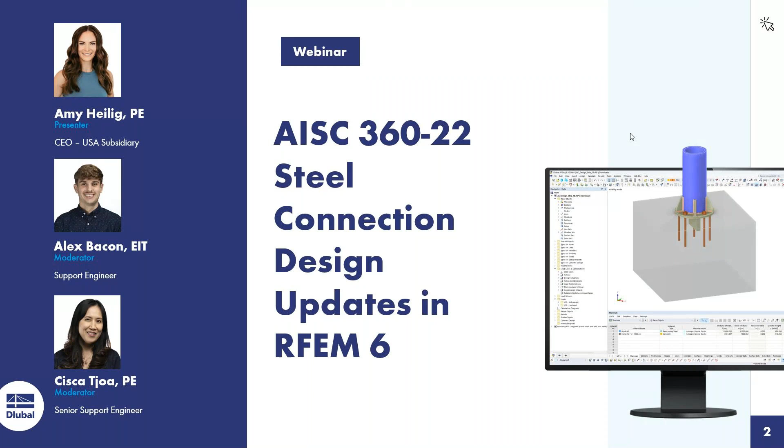Regarding the content over the next hour today, I want to give a brief introduction to the Steel Joints add-on for connection design within our program RFEM 6. We'll talk about several of the new features and design options available, and then move on to our examples. The first will be a steel carport, where we'll design several different connections showcasing some of those new features. Our second example is this steel platform shown on the right-hand side.

Throughout these two examples, we'll talk about the connection component and data input. Of course, we'll run the calculation and take a look at the analysis and design results as well.

For those of you joining today that are not familiar with our program RFEM, we work with this add-on concept. RFEM is the base program, allowing us to fully model our structure, whether steel or some other material type. We can integrate with BIM software and get a full static analysis. But when we want to carry out the design of our steel members according to the AISC or the CSA standard, we will need the additional steel design add-on.

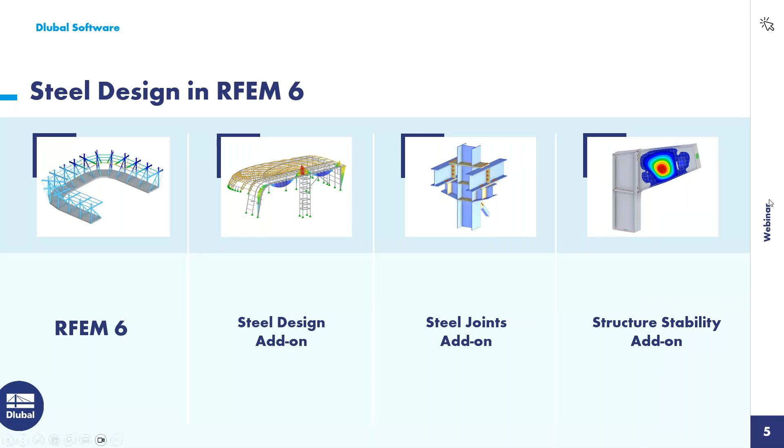We'll give a brief introduction to the Steel Joints add-on. I'll preface that this will be very quick, just for what we have time for today, but there is a previous webinar linked here in the PowerPoint that goes into a little more detail of the basic functions within this add-on for new users, so you can refer to that. The PowerPoint is available in the chat today. We had an issue uploading it to GoToWebinar, so you'll find the download link within the GoToWebinar chat.

In summary, the Steel Joints add-on utilizes what we call the component-based finite element method. This creates an automatic nonlinear submodel generation for every connection that we're defining within the program. This is a benefit because it allows for the design of unique and non-standard connections. We're not just limited to standard connections like other analytical connection design programs allow for - really, you can dream up any connection.

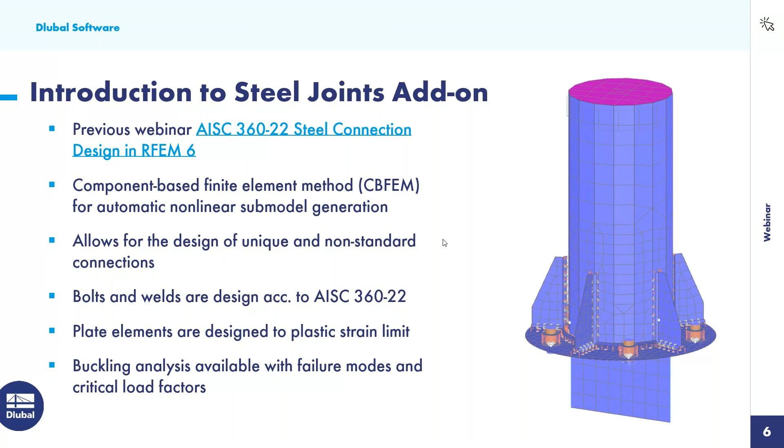The bolts and welds are designed according to the AISC 360 standard, while the plate elements are code independent, but designed to the plastic strain limit. As mentioned, the buckling analysis is also available, where we can take a look at the failure buckling modes and the critical load factors, and determine where we might need to apply stiffener plates.

So we might be wondering, what are the benefits of this particular add-on over other connection design programs? Within the RFEM 6 Dlubal Center, we have access to an extensive library with standard connection components. This means that if we have a pretty basic connection, we can always go to our library and insert these components automatically into our model. But we can always build up our own non-standard connection type as well with individual components - we'll see both of these options in our examples today. We can save that to our library for future RFEM use. We really pride ourselves in having a transparent output of our design checks.

Within the welds and bolts, as you can see on the right-hand side, you can see a line-by-line output of the code equations, the code references, and ultimately how we determine that design ratio. But even more so, you can actually download the submodel we've generated underneath the hood for this connection and open it up like we would any other RFEM model.

We can also calculate the true connection stiffness, so the axial and rotational stiffness of this connection, and we now have the ability to automatically export this stiffness back out to the global model in RFEM for the member end fixity.

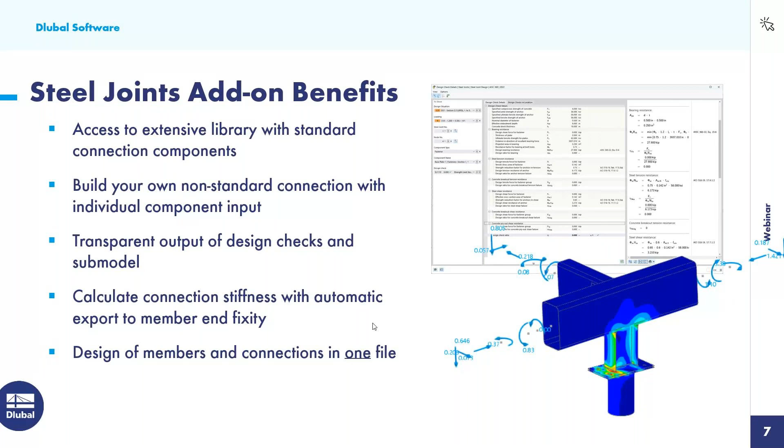And finally, this leads to the design of the members and the connections in one file. We no longer have to export out member end forces to a third-party program every time the model updates and have to re-export those forces, but rather everything is working together again in one file.

So we'll move on to our first example, where I first want to go over a few new features that we have implemented within the Steel Joints add-on.

The first is a new component called base plate, for base plate design for foundation connections. We released this earlier this year according to the AISC. It allows for the design of the base plate connection with the cast-in anchors. Our design output shows the design of not only the plates, but also the welds, the anchors, and we have that steel to concrete interaction.

The third new component we'll discuss is the type rib. This allows us to quickly define multiple longitudinal ribs on a member plate. You can see here we could apply this to a web member of an I-beam, or it could also be applied to a circular hollow section, which is what we'll see in our example today. We have the ability to automatically specify the welds based on reference objects, so quite user-friendly in terms of defining this new component type rib.

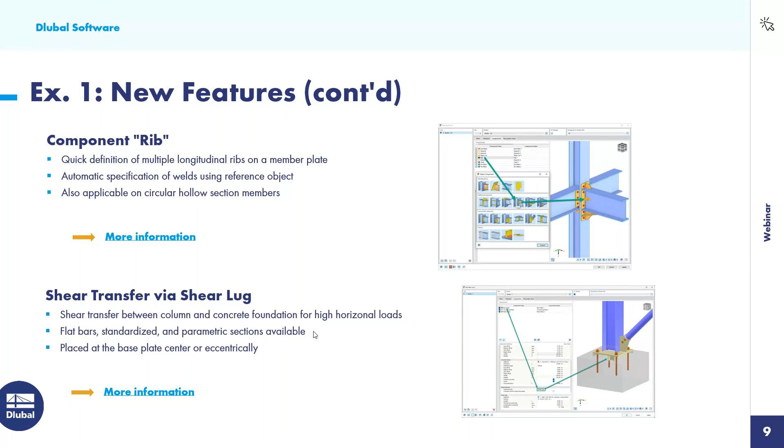Okay, so we'll go to the program RFEM here to begin our first example. Before we begin, we are in our base data dialog box. This would be the initial dialog box when we create a new model, and under this second tab are all of the various add-ons we have available in addition to the base program. For this initial example, we do want to activate here this Steel Joints add-on.

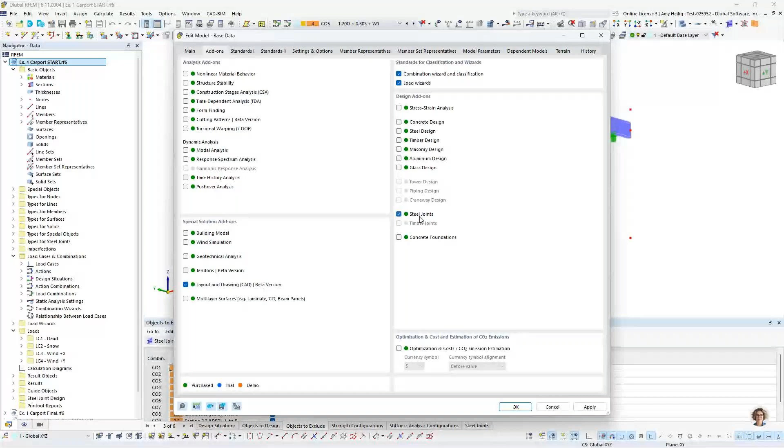Jumping to the third tab, this is where we can set our standard. You can see here the AISC 360, the latest 2022, is available here.

Now we're within the main program RFEM, where I have already taken the liberty to model this general steel structure. This might be some type of carport where we have our columns supporting the steel structure up here at the front, but maybe in the rear you'll notice some nodal supports. Maybe this carport is attached to an existing building, such as a concrete wall. General AISC cross sections as well as materials have been applied here.

So we'll take a quick look at the loads as well. You'll notice that I'll display our dead load. And if I right click here to display separately, this has just been an area load applied through the load wizard over here in our navigator, where I can also right click to display separately to see those loads applied to the members based on their tributary area. A couple point loads as well for this particular load case.

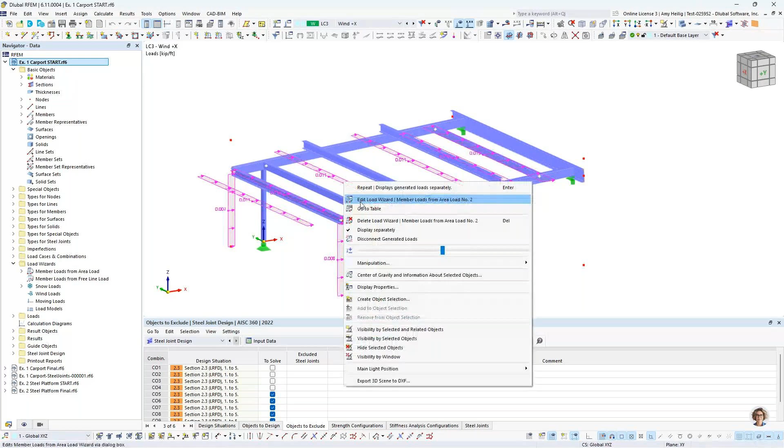Snow load, same concept here, just an area load. And then you'll also see here a couple of wind loads. These have been applied to these nodes that appear to be kind of floating out in space here just to define the wind plane in both the X and the Y directions.

But again, using this load wizard, we have applied this load to an empty or an open structure. So we want it to only be applied to the cross-sectional area of these members themselves. And again, we can right-click to display these loads separately for wind in the X and wind in the Y.

All of these loads are combined according to the ASCE 7. We can see them displayed together here and taking into consideration the factored load combinations. So now that we have done a quick model review, we want to begin with our first connection.

So because we have enabled the steel joints add-on, we have a folder option over here to specify our first steel joint by right-clicking and creating a new definition type here. The first thing to do in this dialog box is to select the nodes, and we want to go ahead and do a base plate design.

We'll select the node at the base of the column, but if we want to do an identical design at the base of the second column, we can select both nodes at once. They don't necessarily need to be defined separately here.

So you can see that the program inputs in the members. For this one, we only have one vertical member. We'll call this one the columns. Under the members tab, again, we just see those vertical members and the relevant cross sections and materials brought in.

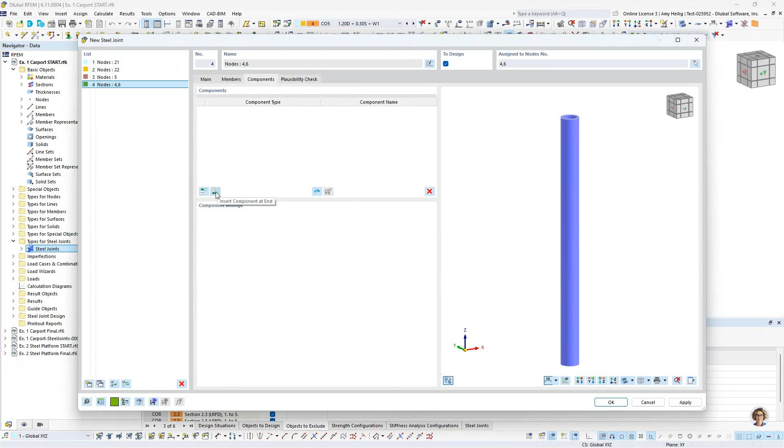Under the third tab, this is where we begin to build up this connection. So we will insert in a new component here from our component library. And one of the new features mentioned in the PowerPoint is going to be a base plate.

So when we insert in this component, we see it shown graphically here, but all of the information at the bottom will need to be revised to account for different materials and different geometry that we want to make for this particular connection. So we'll begin here with the base plate itself.

We want to select the steel material A36 that's already been defined here within the model. If we needed to, though, we could always visit our material library within RFEM. So we access the material library here.

We use our filters over on the left to filter to AISC, and we see all of the relevant steel materials if they haven't already been defined. But in this case, it has, so we can simply select it from our drop-down box here.

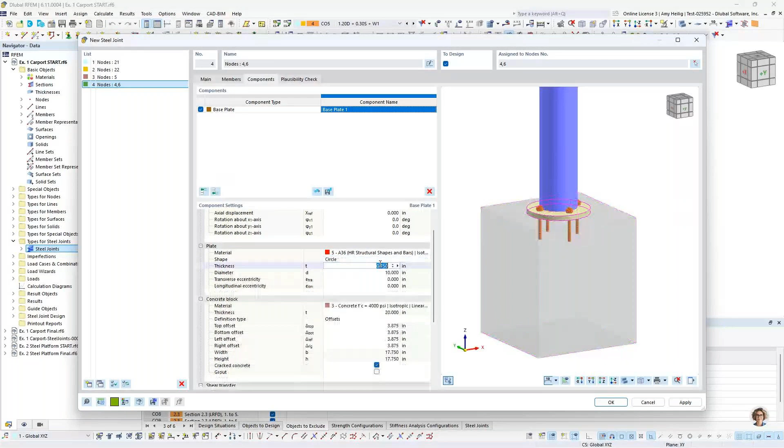Now, rather than a rectangle, we want to modify this to a circle. And the thickness of our plate will be 0.5 inches. The diameter will remain at 10 inches.

And then we're ready to jump down here to our concrete block. So the concrete block material is 4,000 PSI. The thickness is going to be modified to 18 inches.

Now, rather than defining offsets, I'm going to toggle this to defining the dimensions and position directly. So this way I can set the width here to 24 inches. The height will also be 24 inches. We can set an eccentricity, but we'll go ahead and set this as 0.

Now notice we also have the ability to turn on or off if the concrete is to be considered cracked. And with the cracked concrete, this is just going to affect the modification factors that will be used in our design of our anchor, specifically for anchor concrete breakout. We'll go ahead and leave this cracked for today.

Now we also have here the grout that we could turn on or off if we had a grout layer in between the plate and the concrete block.

Under the shear transfer, using this drop down, we can select our new option here to define a shear lug. Now, additionally, I could specify if I wanted to consider friction under the base plate, so if I wanted that base plate to take some of the shear forces. Otherwise, if I leave this unchecked, we'll see most of the shear forces within the shear lug itself.

So as far as the material for the shear lug, we want to select A36, again, available in our dropdown, and we do need to define here a new cross section.

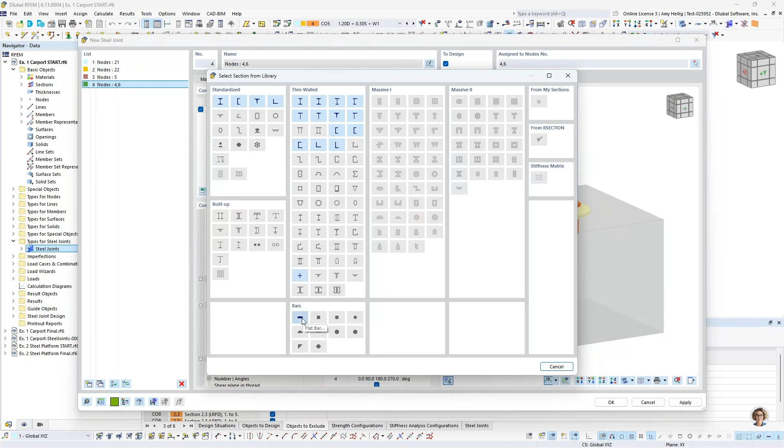So we visit our cross-section library and we can see the relevant cross-sections available for a shear lug definition, including a flat bar. For this, we can simply input the geometry width of 6 inches. The depth or thickness will be 0.5 inches, and we can click OK. So now we see the display of that shear lug graphically here within our base plate.

The length is going to be modified to 4 inches. If I wanted to rotate this or to set an eccentricity, that's also possible here. And then we have our anchors.

For the anchor dropdown, we have the common sizes, including grade 36 here. I'll go ahead and leave the diameter at 1/2 inch. The first input for the anchors is to define the total number of rows that we have, so we just want one row at the exterior of this base plate.

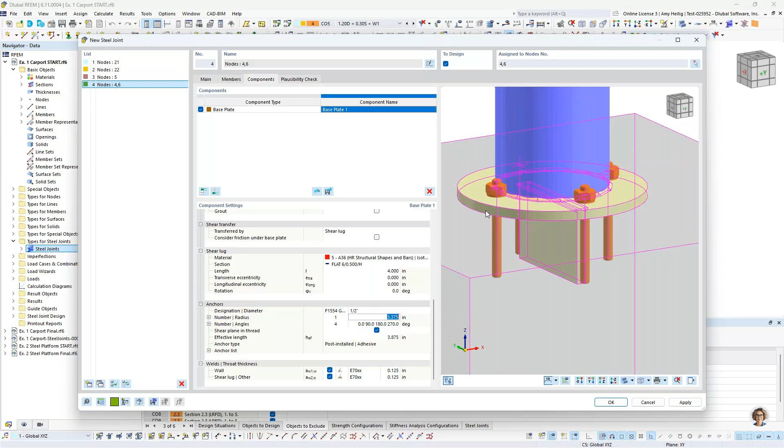The spacing, though, you'll notice we have an issue where it's colliding here with the wall of our HSS member. So therefore, we want to modify the radius to 4 inches, and now we see that anchor move outside that area.

Instead of a total number of 4, we're going to increase this to 5, and the program will automatically space these evenly around the circumference here of the base plate itself. So that all looks good.

We want to define whether the shear plane is located in the thread or not. We can go ahead and uncheck this for today. And we can also modify the effective length of the anchors themselves if we'd like to 8 inches.

Finally, we have the ability here to define the throat thickness. This would be the weld from the HSS to the base plate itself. We'll go ahead and set this as 0.177 inches.

A nice trick in the program is if I hit the down arrow key and simply hit F8, that's going to copy the cell above into the current cell. So that might just be a nice quick time saver for you as well.

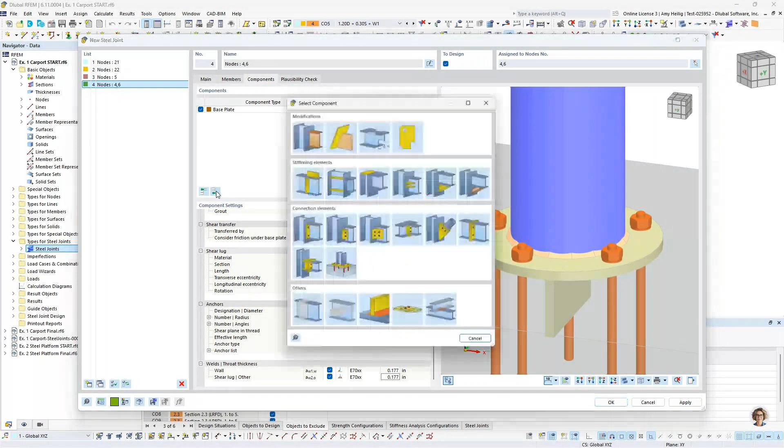Now we want to insert another component here to this connection type, and this is where we're going to take advantage of this new component rib that we also mentioned in the PowerPoint. The stiffened object is going to be the member plate, and within our dropdown, we want to select the column wall. The type of reference is also going to be a plate, and we want the reference to be the base plate itself, that circular base plate.

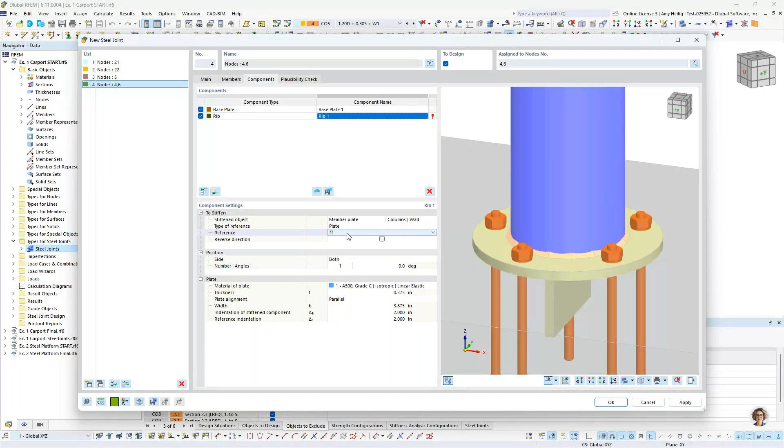We see here that the first rib was automatically generated, but clearly we need to make some modifications to the geometry and placement. So we want to create these ribs, and you'll notice the default here is to set this on both sides of the HSS. Well, we only want to set this on the front side, so we'll go ahead and make that change, and we want a total number of 5 ribs.

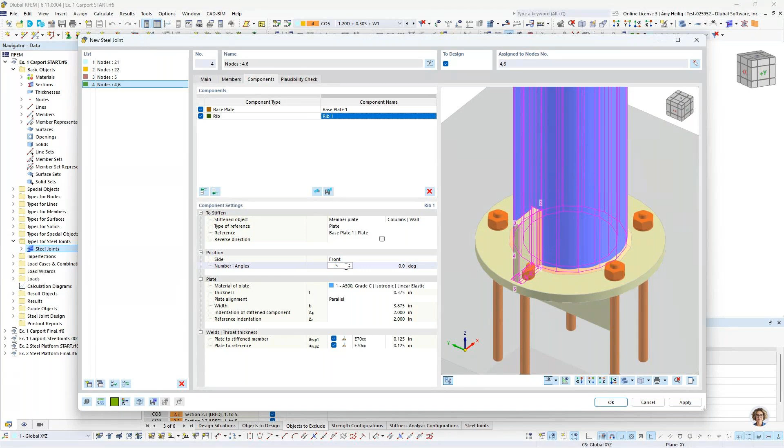The program will create the 5 ribs, but again, we have conflict here with the location of our anchor bolts. So we'll go ahead and set the first angle at 36 degrees. And if I just simply hit enter, the program's intelligent enough, again, to space those ribs out evenly between these anchors.

Now, the plate element would be, again, A36 for this rib. We could modify here the thickness to 0.25 inches. And rather than being a parallel rib, we can use our dropdown to change this to inclined.

With the inclined, we see the geometry update graphically, but we need to modify the width to 4 inches. The height will be set to 2 inches. And then we have the indentation of the stiffened component. We're going to modify this to 0.75 inches, and the reference indentation is going to be 1.25 inches.

Finally, our last input here is going to be our weld throat thickness. We'll modify this to 0.177 inches. Again, using that F8 key, we'll go ahead and copy that down to the second cell here. So that will be all that is needed for this first connection design of our base plate.

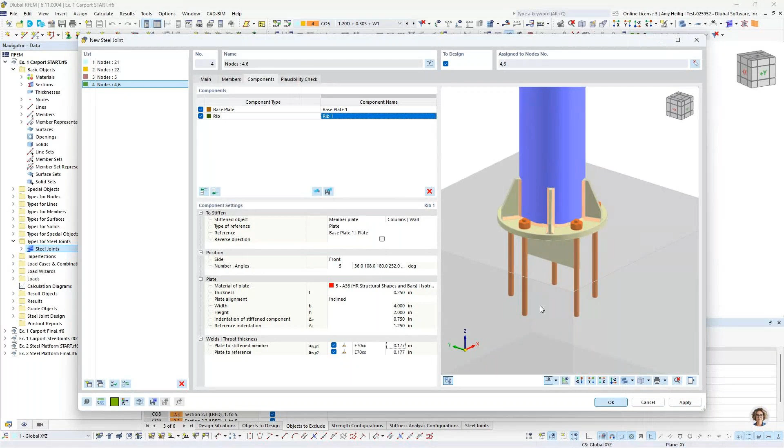Again, we could save this to our user-defined library and always reference it at a later time for a future RFEM model. But going into the graphical display here, back into RFEM in the global view, we can control whether we're seeing these connections globally here in the graphical view with this button in the upper right-hand corner.

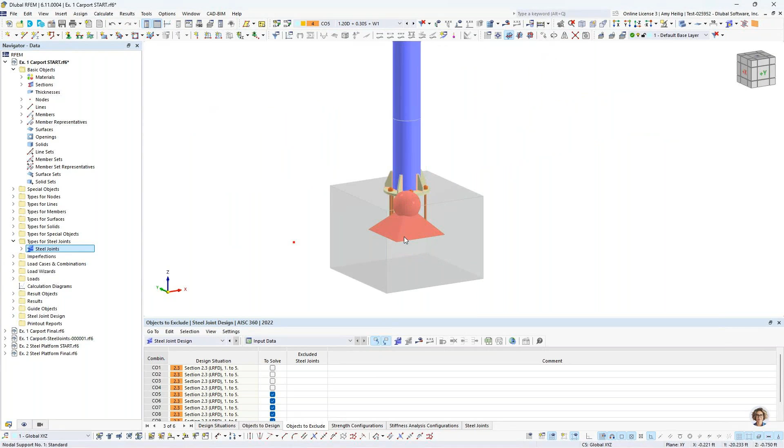So currently I have this set to no joint model, but we can toggle this down to a detailed joint model. And sure enough, what we're going to see here is the display of the base plate that we have just defined. Now you'll notice the nodal support's a little bit in the way. Of course, we need this for the global analysis of our members, but we can always toggle this off graphically if we don't want to display that here.

Okay, so we want to now move on to additional connection types here. I'm going to go back to the PowerPoint to explain a couple more new features.

So another new component is called fastener with anchor in the concrete block. We've had the fastener for quite some time, but we now have the ability to fasten these steel members into a concrete block. Now this might look familiar, like it's similar to a base plate, but this can also be used for connecting a steel member to a concrete wall, for example. That's maybe similar to what we have with our example today, where we want to connect this carport to an existing building, maybe a concrete wall.

We also have a new component called contact. This is the situation where we have the connection of two members, but not through fasteners. Rather, the top beam is simply resting on the bottom beam. With this new component type we need to consider the nonlinear pressure contact between the two parallel member plates, meaning that in uplift we want this connection to fail, but in downward compression we would expect this top beam to bear on the bottom beam. There's also the optional consideration for friction between the two surfaces for those shear loads acting on this connection type.

So we'll go ahead and jump back to the RFEM model here to talk a little bit more about these two different connections. You'll notice that I have already defined here that new fastener connection type that will essentially bolt this channel member to the concrete wall. So let us take a look at this definition type here.

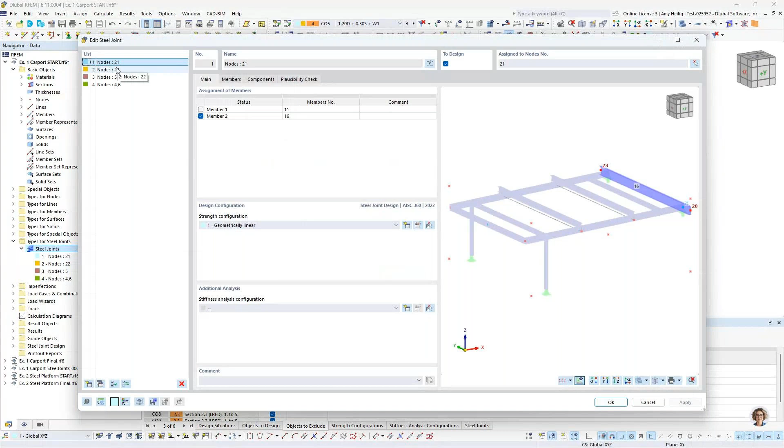So this is for nodes 21 and 22. Now, in this case, I could not define the nodes together in one definition type because they share the same member. So we'll have to create two separate definitions, but it may be worthwhile to define here the first connection at node 21, and then using our button in the lower left-hand corner here, you can make a complete copy of a connection and then just make minor changes to the geometry for node number 22.

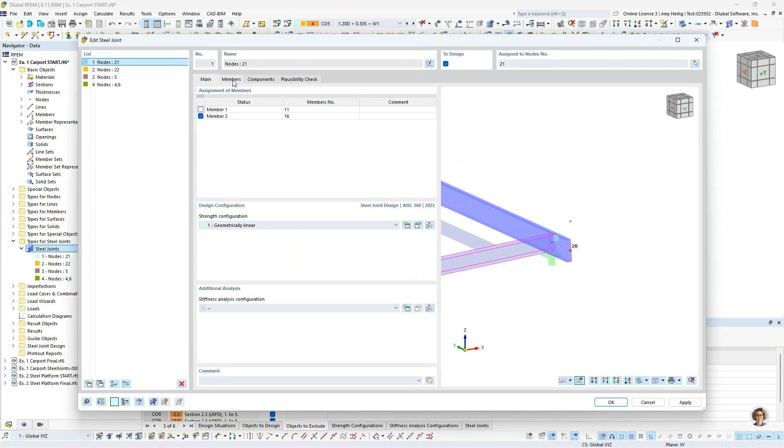Now, what typically would be brought in here is also this transverse member, but I'm not interested in designing for that connection, so I can simply uncheck it here. And now we just have our single member that is listed here under the second tab, member number 2. Under the third tab is our components.

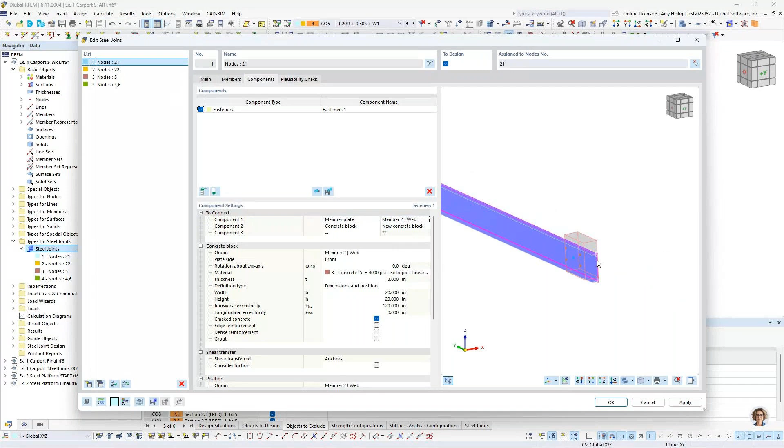So we would insert a new component of the type fastener, which I've already gone ahead and done here. We are going to reference component number 1 to the member plate, so this is going to be the web here of our channel. The second component is going to be a new concrete block, and that's what you're seeing behind the member shown here graphically. The concrete block should look very similar to what we just saw with the base plate. We define here the material, the thickness, the width, is it cracked, does it have that grout layer, and so on.

Now we also have the shear transfer. As I mentioned, we can consider friction here if we wanted to. And then ultimately we're going to also place the anchors. So I have 2 rows and 2 columns of anchors, both in the longitudinal and transverse directions. We set the spacing based on the member end. You can see here the first spacing is set at 256 inches because it's referencing the end of the member on the left-hand side.

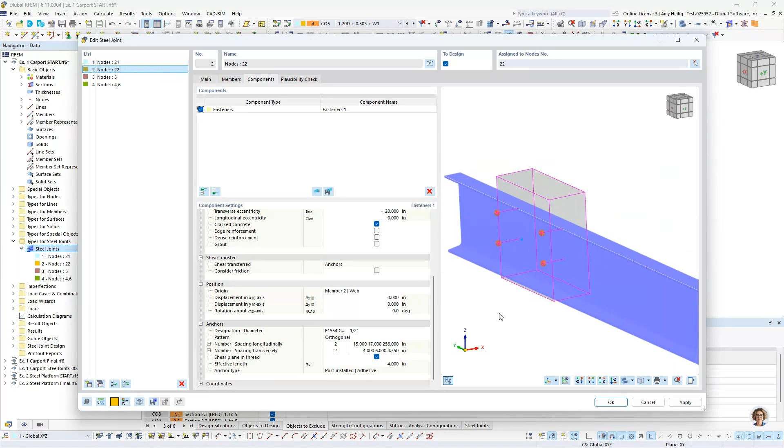So once we have all of this information input for our connection on the right, again, we could just make a copy of that and just modify maybe the offset, the location here of these elements, for the left side of our member. Now that this connection is complete, we see them again displayed graphically back here in RFEM. We will create a new connection type while we're within this dialog box.

For this one, we want to graphically select this node that is shared between this top beam resting on this HSS member. So I can graphically select that commonly shared node, number 9. When I do this, you'll notice that graphically I see all 4 of these members. So I did have to break apart these members into smaller segments, but that's no problem for the connection design.

Under the members tab, we just want to make sure that we toggle this rather than being of the type ended, that it's of the type continuous. That will tell the program that it will detect that this is one continuous member at the top and one continuous member at the bottom.

Now you'll also notice here the supported ends. It's important to understand that we are generating this FEA submodel underneath the hood, completely separate from our model here in RFEM. So we're going to extract out these members, but in order for it to be in equilibrium, we have to support at least one of them. In this case, I'm going to support member number 3 here.

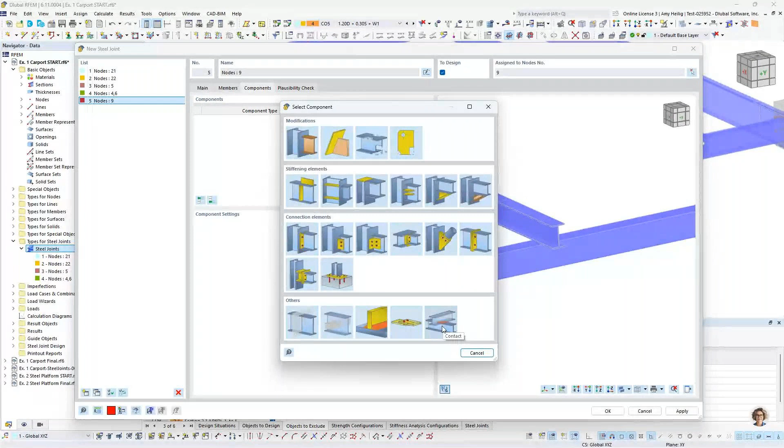And finally, we're going to visit our components. For this one, I'm going to create a new component, and we have the new type here called contact. When I input in this information, this should be pretty straightforward, not too much information to input down here at the bottom.

Our first component in contact is going to be set to the member plate. Within my second dropdown, you'll notice that the program will go ahead and highlight exactly the elements I want to consider. So we want to choose here, all the way down closer to the bottom, members 2 and 3, flange 2. Again, we can see that highlighted here.

The second component is also going to be a member plate, but this time it's going to be members 1 and 4 and flange number 1. Again, what the program is going to do with that submodel is create that nonlinear contact behavior all automatically underneath the hood, considering that this member is resting on the HSS element itself.

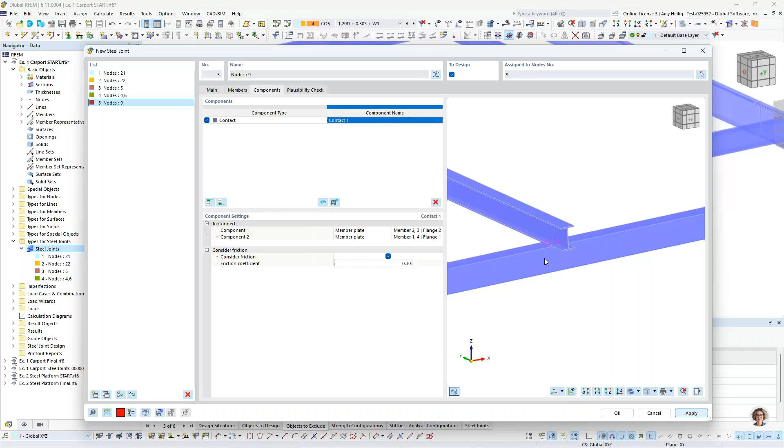Now, if we wanted to consider friction for those shear forces, we could go ahead and activate that and input our friction coefficient here as well. All right, so we will want to move on now that we have this final connection defined, to our last connection type that has already been modeled here.

Let me go back to the PowerPoint to explain a few more new features. The next new component is called stub. This allows us to extend a member with another stub member, and we can connect this member based on an offset from a reference member, giving it a length. The stub member doesn't necessarily have to have the same cross-section or material; it could be completely different.

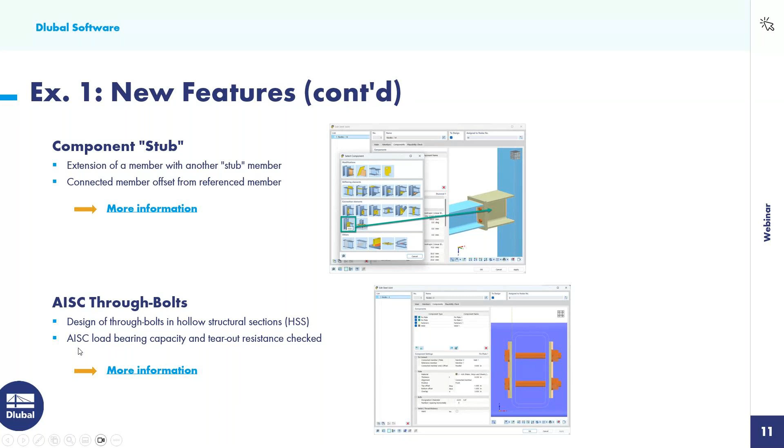Going back to the RFEM model, once again we can see that this connection has already been defined here. We'll just quickly go through some of the elements. Under the components here, you'll see the new component type called stub. We could find that here in our library — here's the new stub component.

With this, we will simply define our material of our stub member. In this case, it's going to be A992. The cross section is a W6x9, but we can always define here a new cross section directly from the RFEM library. We would also specify the length, and then that stub member is created.

Now, what's nice is that you'll also notice these plate elements and bolts defined here, all done within the same component. I don't have to define new components for the plates; my plate is set to A572 grade 50 material. I give it a thickness, I give it the dimensions, and then my second plate can be set to identical as the first plate. We also have defined here the A325 bolts passing through these plates, as well as our welds and our throat thickness.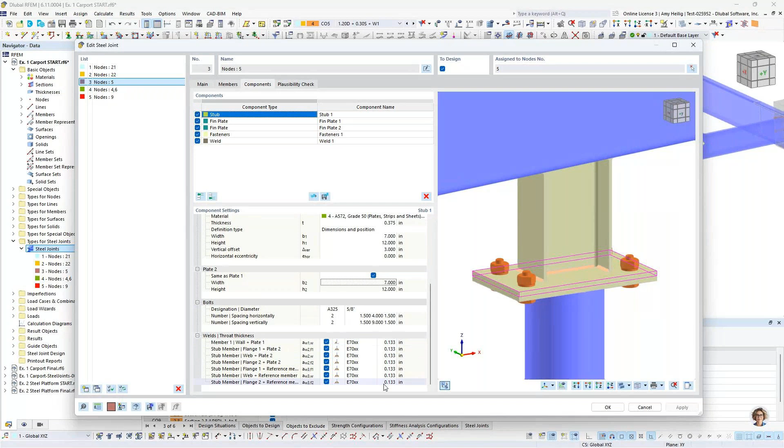By the way, I also wanted to mention that the weld type is also available here in this dropdown. The default is the fillet weld, but we also have a couple other weld types like the butt weld available too. So that's the stub component, and that's really all that's needed to connect this column to this HSS beam.

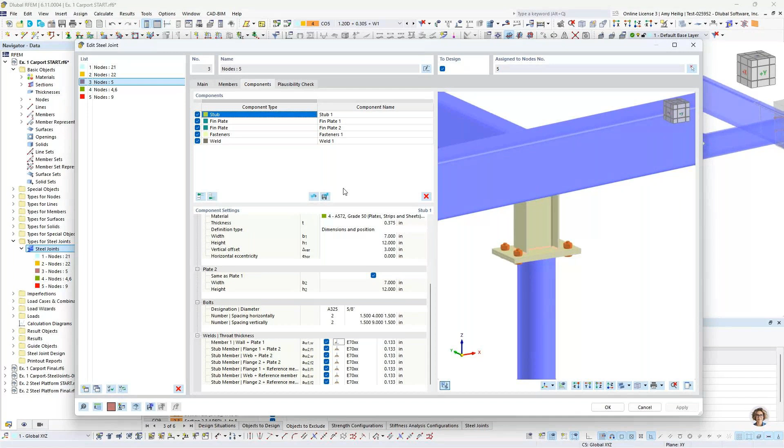Now, if I rotate this connection around, and I'll go ahead and turn this into a transparent view, we have a few additional components defined here.

The first is the fin plate. So we have a fin plate at the left and the fin plate at the right. Again, we're just giving it a material, the thickness, the dimensions, and telling the program where it's attached to. We don't have any anchors or bolts defined within this particular fin plate.

Instead, we define a new fastener component from our library. This allows me to specify that both the fin plate and the wall of my HSS should be connected to the adjacent one with the bolts that I have designated here. So we have just one row here, but we have 2 bolts located in the vertical direction. We give it the spacing and so on. So we can see those through bolts passing here.

And finally, we have our welds that will connect the fin plate directly to the HSS element. Okay, so now that we have all of these connections defined, we're ready to run our calculation.

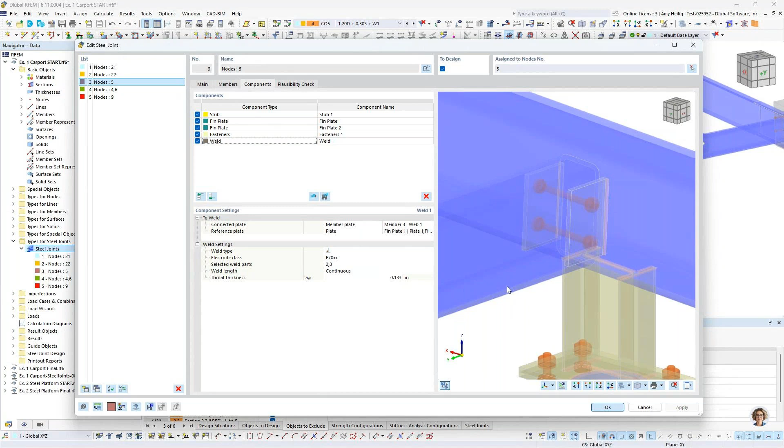And before we get into the results too far, we're going back to the PowerPoint yet again to talk about a couple new features related to the calculation and the results we're about to review.

The first one is the life cycle of design results. This is actually available with all of our design add-ons now. And this is really nice because if we make any small changes to the model—regardless of design properties, settings, or geometry—if we don't make modifications to a specific connection, then those results will not be deleted.

So what I mean is we have two connections in our model and we've already run the calculation. We can go ahead and make modifications to one of the connections and the geometry without deleting the results of the other connection. This will be a big time saver when running calculations for something like steel joints. So the recalculation will apply to the invalid design results only, but the previously calculated results that are still valid will remain available to us in the program.

We also can view the graphical display of contact stresses for base plates. So we'll see in just a minute how we can now display those contact stresses shown graphically as you've seen here on the right-hand side.

Okay, so we will go back to the RFEM model and we're now again ready to run the calculation. So we jump down to the steel joint design within our table. And the first tab here is our design situation.

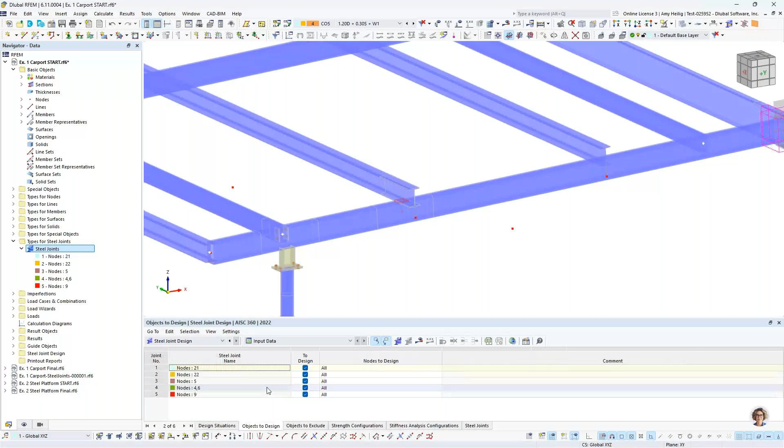But under the third tab, this lists each individual load combination, 1 through 10. And notice that you have the ability to uncheck load combinations. We are generating this submodel underneath the hood, and we are going to rerun each of these submodels through all load combinations. So it's highly recommended if you know some load combinations are not controlling, uncheck them here so that we're not rerunning them in the submodel, taking up more calculation time.

You also have the ability in this additional column to exclude certain joints from the calculation. For example, load combination 9, if I wanted to exclude joints number 4 and 5 but still run this load combination for the rest of the connections, I can do so. Same thing maybe with load combination number 10 here.

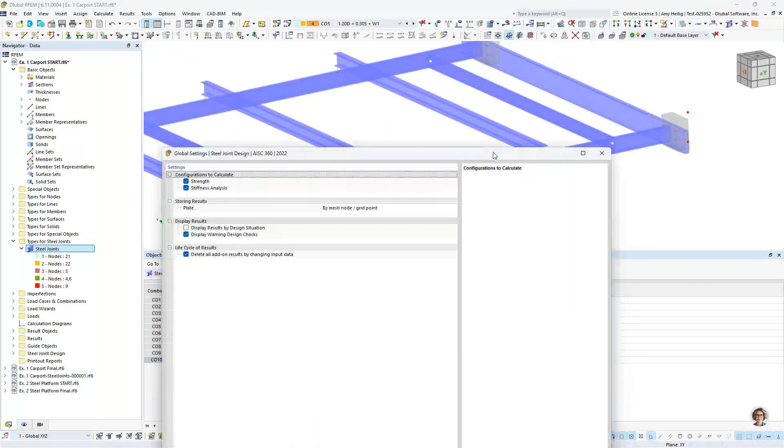The other thing to point out before we run this calculation is if we go into the global settings within the table, you see this new life cycle of results. So we want to ensure that this is turned off. This way we can make these modifications to specific connections without affecting the results of other connections where the results are still valid.

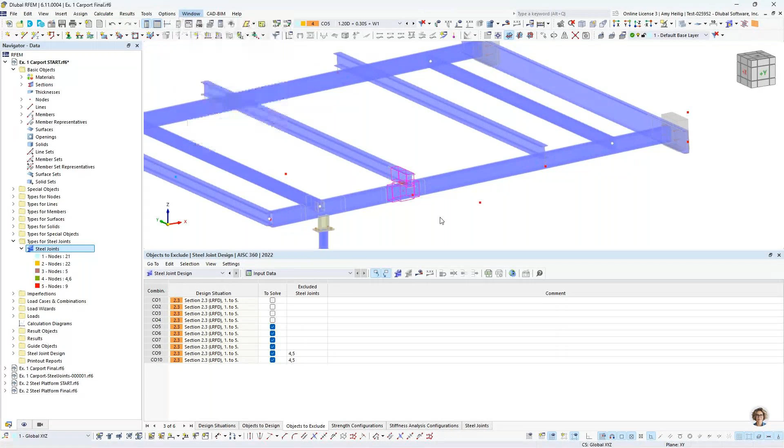So this is again that new life cycle of results. We want to make sure that that is unchecked. Now we'll drop to an already saved model so that we don't need to wait for this calculation to run.

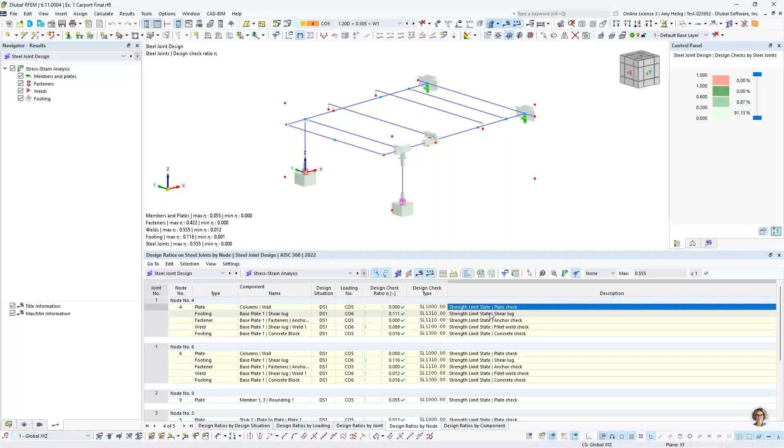When that is complete, we're back in our table format viewing the steel joint design and stress strain analysis. For each of these connections, we can view the design ratios by node. So for our base plate, for example, we'll see all the design checks for our plates, shear lugs, anchors, fillet welds, and the concrete block itself.

If we zoom in here for a closer look, with each of these design checks we can always access what we call the design check details, which I mentioned earlier in the PowerPoint. This gives us the ability to take a look at the design checks of the shear lug, for example, line by line with the formulas given to us along with the code references. Down here at the bottom is the controlling design ratio based on all of these checks. So again, a lot of transparency here in trying to understand where these design ratios are calculated from for each of these elements.

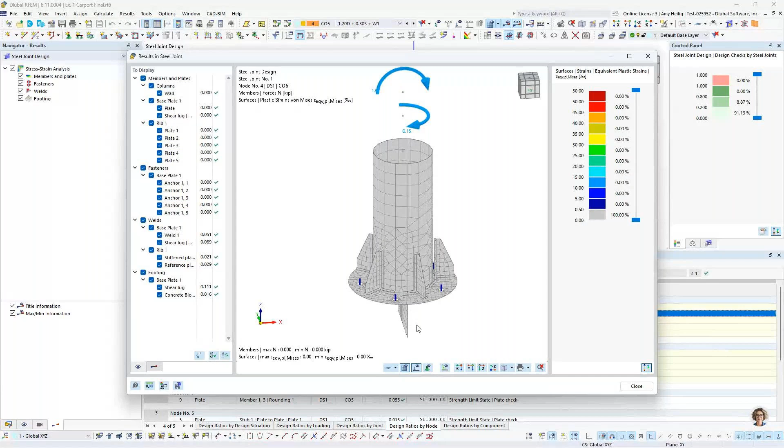Now we also have access to what we call the submodel. This is just a graphical view of that submodel that's created, so we can see here the FE mesh. Everything's happening underneath the hood here. We have the applied member end forces for this particular load combination.

Under this second tab, we're currently viewing the plastic strain. Not much going on here, but we can toggle this to the equivalent stress so we might be interested in seeing the higher stress points of this connection, wherever that may be. In this case, it's around the shear lug.

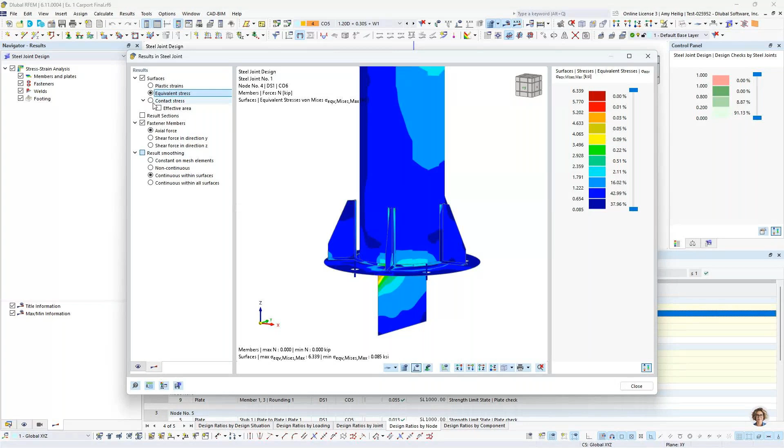I also mentioned in the PowerPoint the ability to view that new contact stress directly on the base plate itself. So we can toggle on the effective area, 0.53 square feet, or we can just view the contact stresses directly here along with our color format over on the right-hand side.

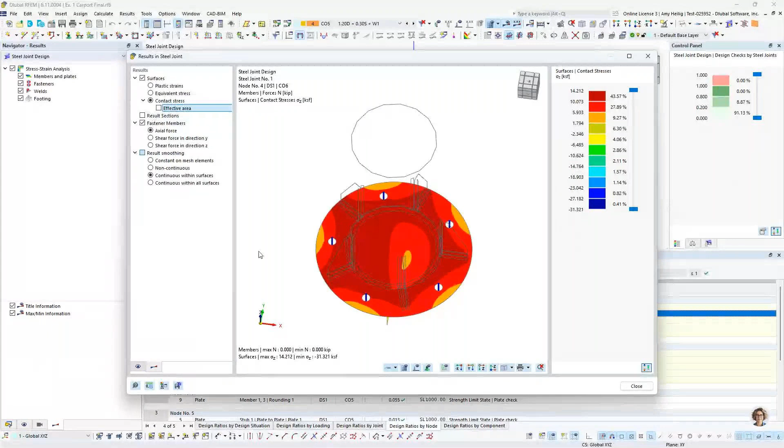Now we also have the option for this particular model to save it to our computer. I mentioned this also in the PowerPoint, that you can save this model and open it up like any other RFEM model. So we'll go ahead and take a quick look at what this base plate design looks like underneath the hood. When you open up this saved connection, it's going to replicate all of our connection components.

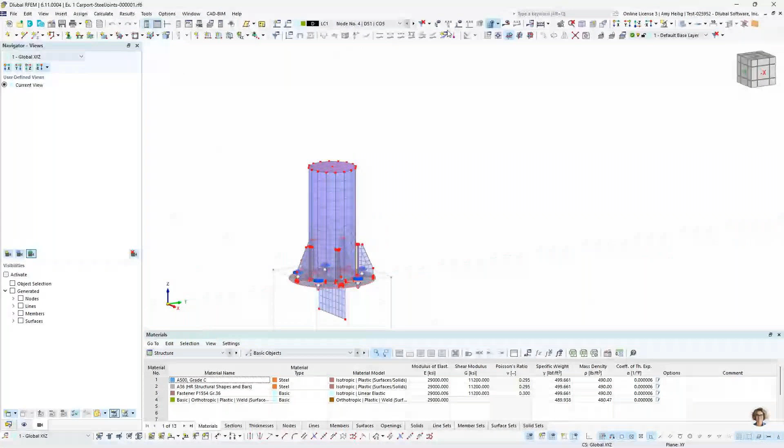Everything is a nonlinear material. We have a lot of geometric nonlinearities as well that are taken into consideration, but all of the bolts, the welds, the plate elements are modeled with the relevant FE mesh size, again all underneath the hood. You can see here the member end forces through each of these load combinations that the program is running through in order to come up with that design. So again, just a nice useful feature if you're interested in pulling up that submodel.

Now the results are also available here under the steel joint design, of course, for our other connection types that you could take a look at here.

All right, we will now move on to our second example by going back to the PowerPoint to discuss yet again some new features here.

So for our second example, we want to take a look at our new connection library in the Dlubal Center. We previously had the connection library, but it was integrated directly in the add-on, so we simply migrated that to what we call our Dlubal Center. This gave us better filter options, and we continue to add on to the options available here.

Now we can directly access the library from the add-on to assign these predefined connections to nodes, and we'll see how those components then come in automatically. We can make small changes to them, and that will be more time efficient. As also mentioned, you can save any connection under your user-defined connections, also located within the library.

New as of this week, we now have the ability to export a 3D DXF from the steel joints. This is very exciting as well. You can generate a DXF file from the connection geometry, and with this, 3D line models will be generated for each of these elements. Then it's possible to open up this DXF in something like AutoCAD, but also other programs like Tekla. Tekla can accept maybe a background layer of a DXF, so this will be helpful in integrating RFEM with those other BIM-type programs.

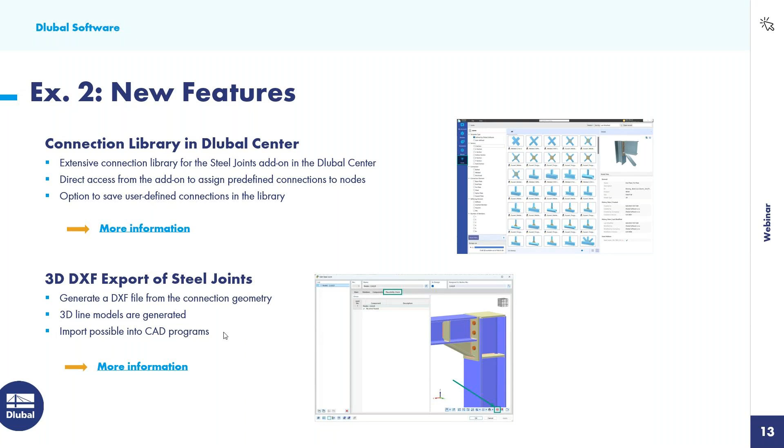And finally, we have the joint structure interaction. We touched on this topic earlier, but we have the ability to automatically calculate the connection stiffness. We've had that for quite some time within this add-on, but what's new is that we have the ability to automatically consider the joint structure interaction, where we take the stiffness properties of this connection and export them back out to the global model. These become new member hinges for our actual member analysis and design. We're typically used to something being fully fixed or fully released with our member hinges, but now we can account for the true connection stiffness for the members themselves.

So we will go into RFEM for our second example today. We'll go ahead and pull it up here, and I will begin once again in the base data dialog box.

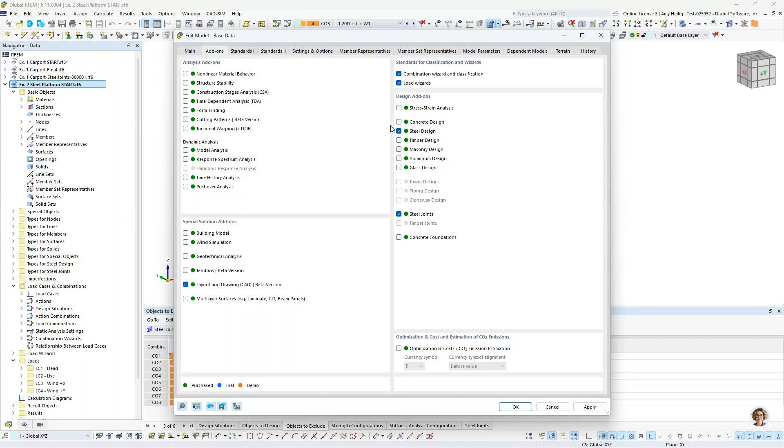Taking a look at this dialog box, under the second tab, we've activated the steel joints add-on, but I've also activated the steel design — this is for the connection design, and this is for the member design. Under the third tab, we can set the AISC 360, the latest 2022 standard, relevant for the member design, but we can still carry out the connection design, all in one file.

So we will do a quick model review here. This is just a simple steel platform with AISC cross sections and materials all defined. You'll notice that these transverse members have a symbol shown here to represent the member hinge that has been defined. If I double click on this, we see the hinge definition turned on here, because by default everything's considered fully fixed unless we activate this hinge.

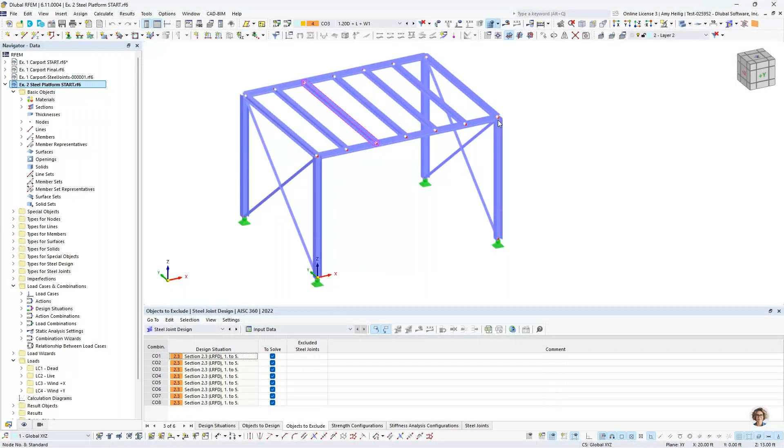In this case, I applied a simple moment release. You can see the 3 degrees in translation, 3 degrees in rotation, and I've released the rotation about the member's local Y and local Z axes. Now, as far as our moment frame in the X plane here, everything is considered fully fixed — this column connecting to this beam, connecting to this column, again no hinges defined. Everything is completely rigid here.

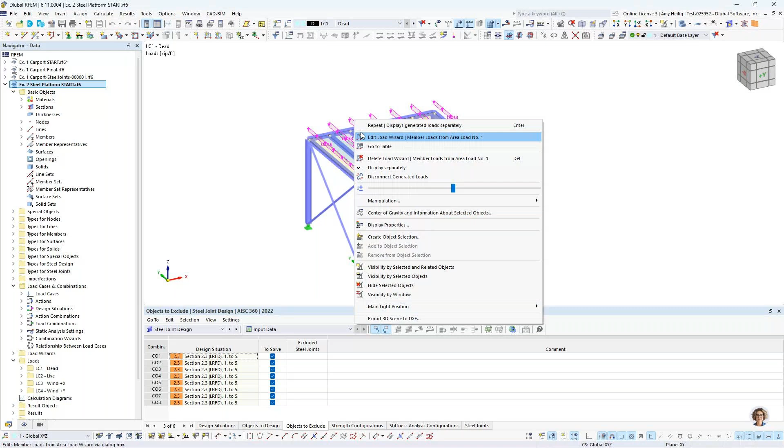Taking a look at the loads, pretty similar to our last example. We can display this area load — we have our dead load. We can right click to display this separately, and turn that back off for just a general area load graphical look. We have live load, we have wind in the X — taking a look at these loads displayed separately here — and then we also have wind in the Y direction.

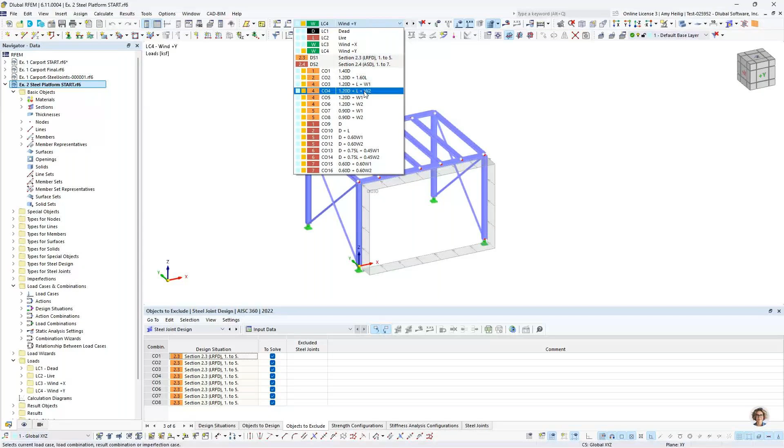So pretty basic loads. Now we have combined these according to the ASCE 7. You can see in our drop-down box here we have our factored load combinations, combining all of these loads, and then we also have our unfactored load combinations in red here. So again, we combine all of the loads with the relevant factors from the ASCE 7.

Now, before we move on to our connection, I actually want to carry out the design of some of these members themselves. So I jumped down to the Steel Design add-on, and let's take a look at our input data. We have here our 2 design situations that just group together our factored load combinations. We want this set to an LRFD strength design, and then we're also going to carry out the serviceability design for deflection checks based on our unfactored load combinations from this second design situation.

Under the objects to design, I'm only going to design these 4 columns — I've just graphically selected them here, and I'm not designing any of the other members at this point in time. So when we run this calculation, we get the results immediately shown here. This is an overall envelope summary of our 4 columns for our strength limit state design and our serviceability. It's worth mentioning too that very similar to the connection design with the member design, we also have access here to our design check details, where you can see all of these formulas line by line and ultimately how that design ratio was calculated according to the AISC.

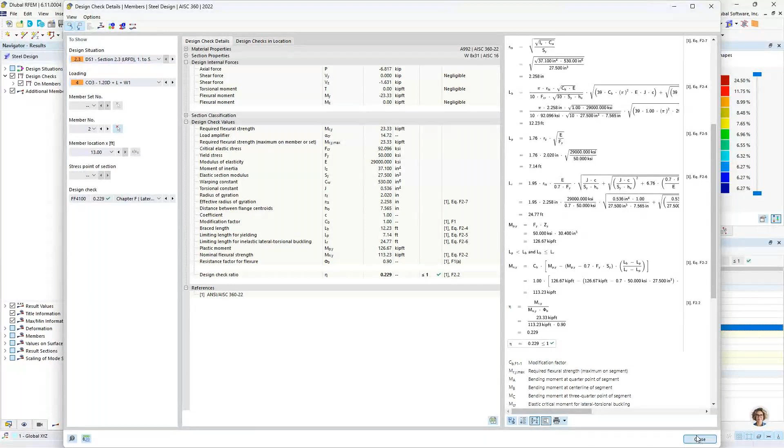So, very transparent there as well. Now, we're kind of assuming that maybe for this steel platform, it's holding some type of very sensitive mechanical equipment, and serviceability is really going to control here. So we've set our limiting deflection ratio to something very low, but we can see that overall these 4 columns are still passing even for serviceability, right below the design ratio of 1.0. So everything looks good here.

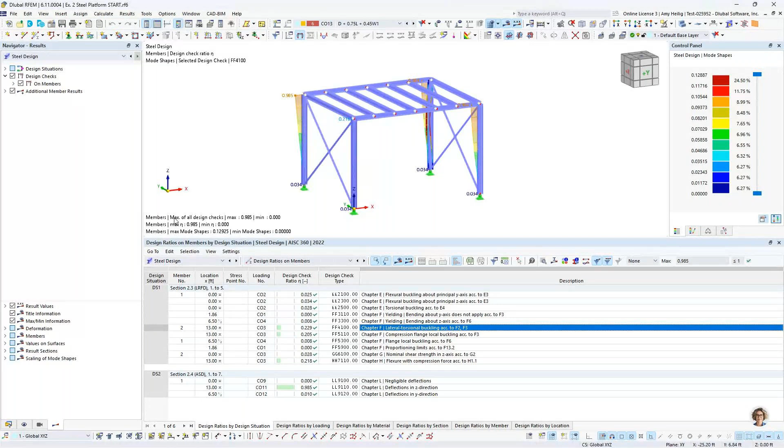So we now want to move forward with our connection design. I'm going to go back to my navigator over here on the left. Again, very similar to example number 1, we have here the types for steel joints, where we can right click and create a new definition type.

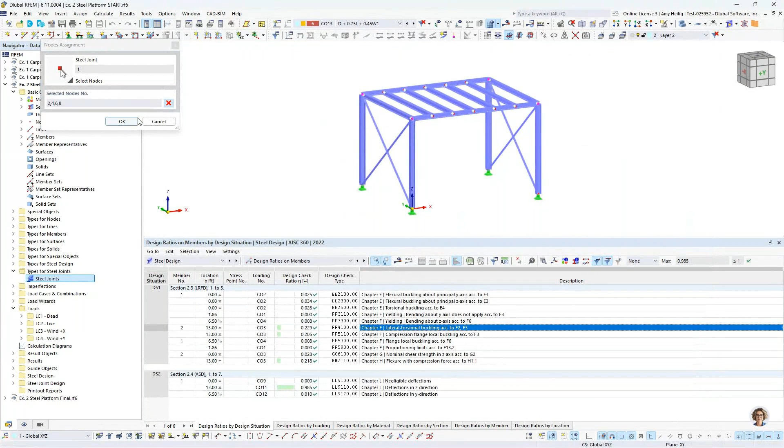So we want to select the 4 nodes here at the top of our moment frame. Notice that I'm grouping these all together because they are identical connections. So this brings in all of the members at these particular locations. Well, the first members here, we can rename this one to columns.

And then our second set of members that are brought in, these are going to be our beams. Now, for the transverse members, I'm actually going to turn these off. I'm not interested in designing them for my connection. Same thing with my X braces, so notice we'll just kind of turn those off altogether. I'm only interested in designing this moment connection here from the beam to the column.

Well, down at the bottom, we have what's called here our stiffness analysis configuration. And within this dropdown, we have the ability to create a new configuration or edit the existing configuration that's here in the model. And if we take a look at this definition type, this allows me to automatically calculate the stiffness of this connection.

Now, this first configuration, notice I have the joint structure interaction turned off. This is just simply going to give me the stiffness values once I carry out the connection design. But the second configuration has this option turned on. This means that it's going to export out the stiffnesses as new member hinges in my global RFEM model, and that's actually what we want to use today. I'm going to use my dropdown for that joint structure interaction to take place all automatically.

So under my second tab here are my members. I have my columns. Again, we want to at least set one of these members to supported, but this is where I can set the stiffness analysis. So in this dropdown, I can say, okay, let's go ahead and calculate the stiffness, not only for the axial, but also the rotation if we wanted, MY and MZ. So we can go ahead and turn those on. No need to do it for the beams; we're just going to do it for the columns here.

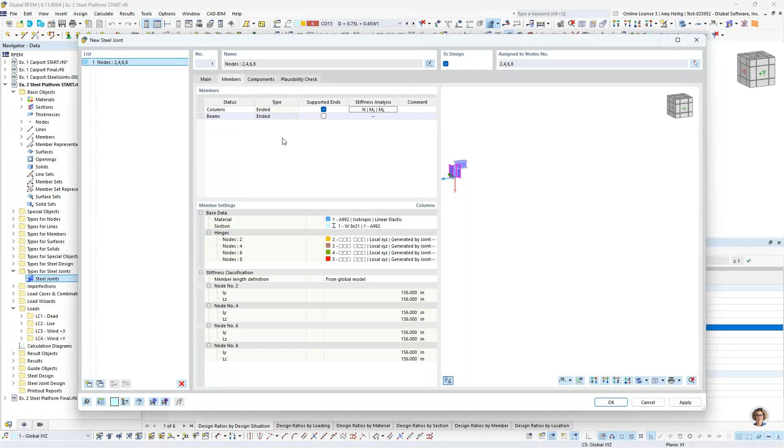So once we have this information input, we're ready to jump to our components. This is where I want to take advantage of our library and show you how we have moved this to the Dlubal Center. Within our library, you can see all of the various options that we have for pretty standard connections, including base plates, but then we get into our member connections.

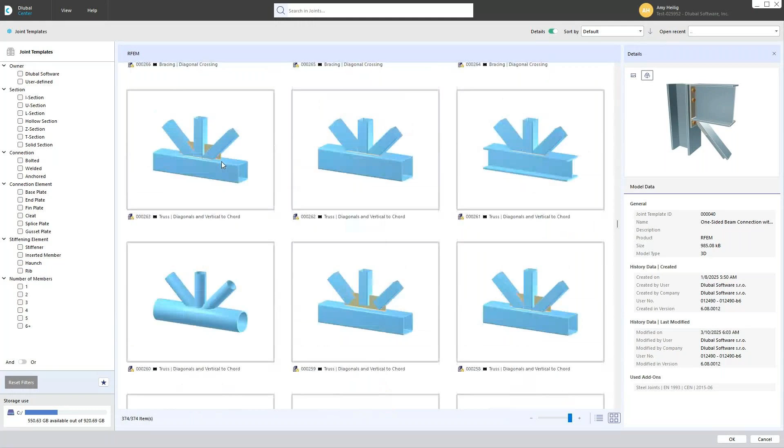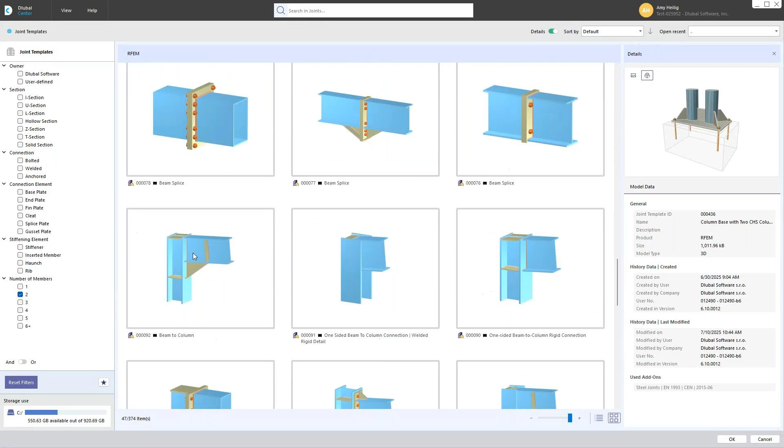We can utilize our filters over on the left. Notice our user-defined filter is also available here for any connections that we've created ourselves and want to access later. So for this case, I want to set this filter to 2 members total, and I can scroll down here and I'd like to select connection number 84.

So when I have the connection type that I'd like to apply to my model, I'll go ahead and click OK. What this is going to do is take all of these components that have already been defined and apply it to my model. And so we see this come in, and this certainly does not look great.

Well, this is a quick fix here. We just need to reverse what's the beams and what's the columns. So we'll go ahead and use our drop-down options here, and now those elements, those components have been applied here to the model.

Now, of course, we need to make some changes. The geometry doesn't look great, and we'll go ahead and do that now. You can set the materials of all of these elements directly here, or we could individually do it once we get into the various components.

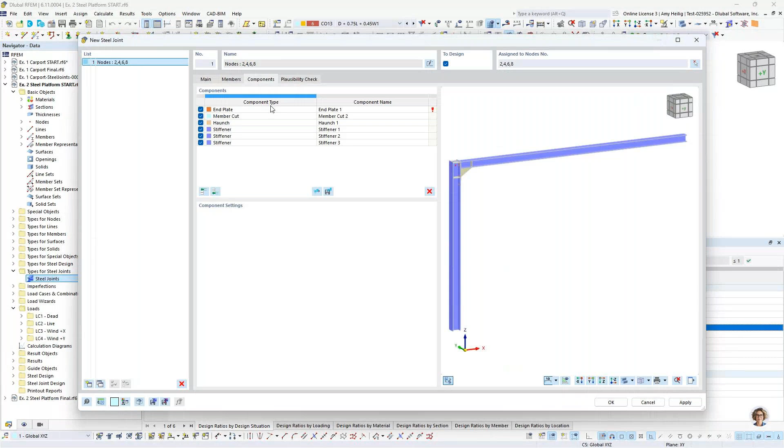All of these components are already defined here automatically from that library. So what we want to begin with first is this top stiffener, and I'm actually just going to delete this altogether. This is the advantage of using the libraries.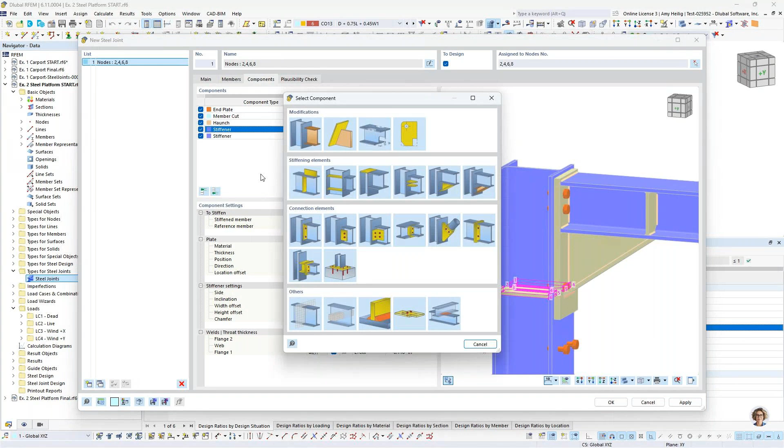We can pull in these components, but we can make any changes we want, including adding new components. In this case, I'm going to add a new cap plate. With the cap plate definition, we want to specify the stiffened member—it's going to be our column. The reference member is going to be our beam, and we want to toggle this to the option farther. There we have our cap plate applied to the top of our steel column.

Now we want to make some changes to the material. We'll set this to A36. The thickness will go ahead and leave as we have it set, but I am going to modify the option here to dimensions and position. We're going to modify the width to 8 inches, the height is going to be 7.5 inches, and we do want to set a small vertical offset to negative 0.25 inches. So we see everything update graphically here.

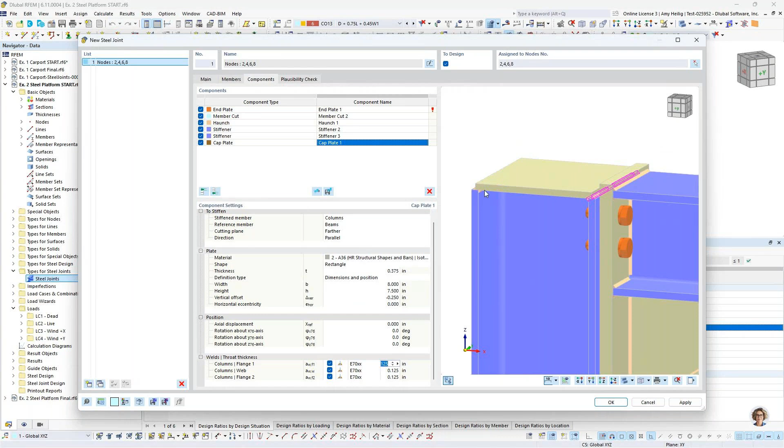Now, finally, we just want to set the throat thickness of our welds connecting the cap plate here to our column. So we'll go ahead and modify the throat thickness to 0.133 inches. We hit our down arrow key and then F8 to go ahead and make those modifications to the rest of the weld elements.

Turning now to our end plate, we can see that the end plate needs some geometry modifications as well. For this one, we want to modify the thickness to 0.5 inches, and I'm going to again select the dimensions and positions option here. I'm going to set the width to 7 inches, the height is going to be 11.5 inches, and the vertical offset and horizontal offset will be set to 0.

So although it's bringing in these components from the library, we're most likely always going to need to make geometry changes unless we have identical members as what the library option does. So for this one, again, making changes to that end plate, this looks quite a bit better.

So our bolts are going to be A325, and we're going to modify this to 1/2 inch diameter. Now we want to have 2 rows in the horizontal direction, but I do want to modify the spacing. The first spacing input is going to be from the edge of the plate on the left to the center of my bolt in my first row. For this one, we're going to set this to 1.5 inches. I hit my space bar, and then I set 4 inches for the space of our bolt to our second bolt on the other side. I hit enter, and the program will adjust those.

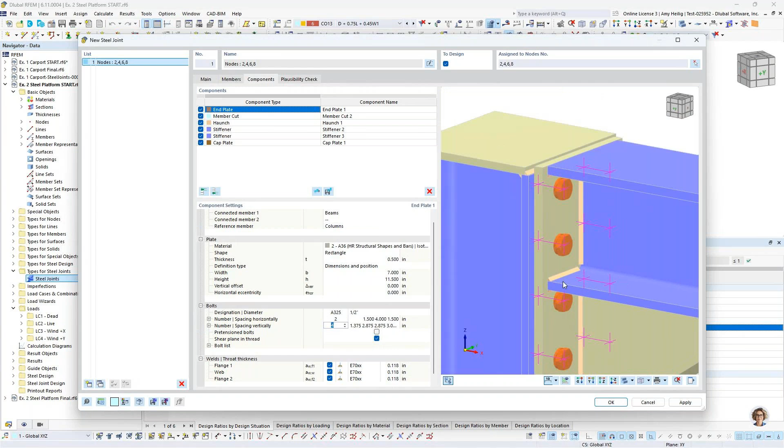Now, I only want to have 3 bolts here vertically, and I'm going to set the spacing from the top of the plate to the center of the first bolt in the vertical direction to 1.75. I hit the space bar. My second spacing from the first bolt to the second bolt is going to be 2.5 inches. I hit the space bar, and my final spacing is going to be 4 inches, and I hit enter. Now the layout of those bolts looks quite a bit better.

If we want to specify pre-tension bolts or that slip critical connection, we can go ahead and do so with this checkbox. Maybe the shear plane is not located within the thread—we can go ahead and turn this off. And finally, we have our welds. We want to modify the throat thickness here to 0.133 inches, and we hit our F8 key to apply that to all welds. So that looks good, but let us move on to our additional components here.

The member cut, we actually don't need this, so I'm going to delete this one altogether as well. And for our haunch, we want to specify this A36 material. I'm going to modify the thickness to 0.375 inches, and I also want to specify the width to 8 inches and modify the height to 4 inches. So that should look quite a bit better, intersecting with that end plate there.

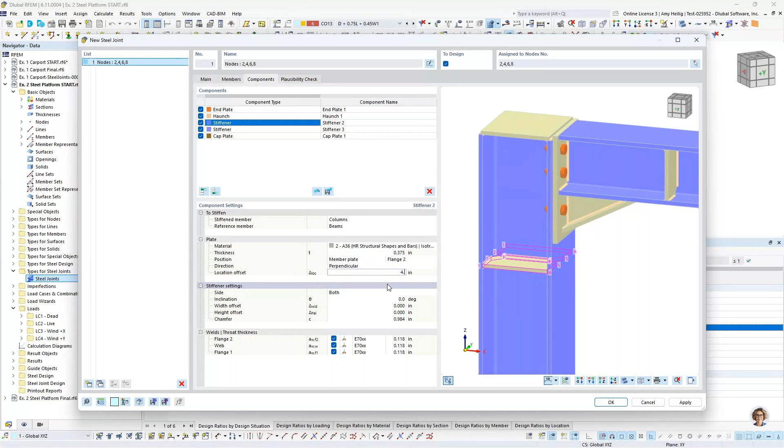Now, finally, we have our stiffeners. So we have our first stiffener located on the left. Looks fairly good, but we need to move this further up in the column. We'll also make changes here to the thickness, setting this at 0.375 inches. And I want to set the offset location, which is measured from the top of this column down to the center of the stiffener. We'll go ahead and modify this one to 4.5 inches, and now we see that looks quite a bit better.

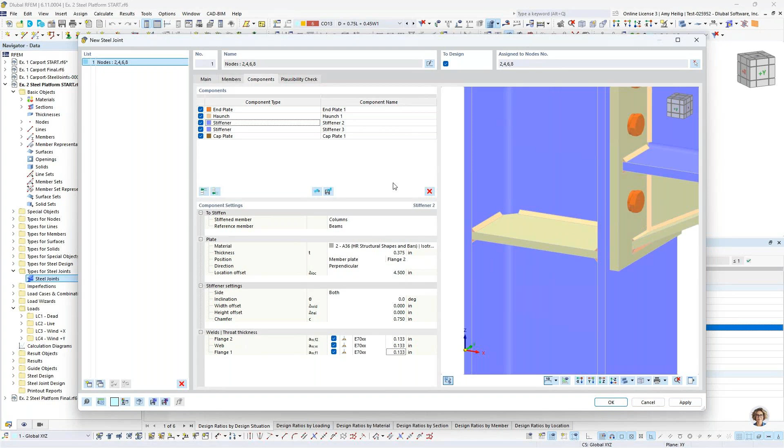We can also modify the chamfer for our weld access here to something like 0.75 inches. And similar to our other components, we'll modify the welds to 0.133 for our throat thickness, hitting the F8 key yet again. Okay, so we finally have this last stiffener to take care of.

Really exact same concept here. We want to modify the thickness to 0.375 inches. We also want to modify the offset here, measured from the left edge of the beam, to something more like 13 inches, so that will bring it over to a much better location. And then looking at our chamfer thickness here for that weld access as well, 0.75, and modifying our throat thickness for our welds to 0.133 and our F8 key.

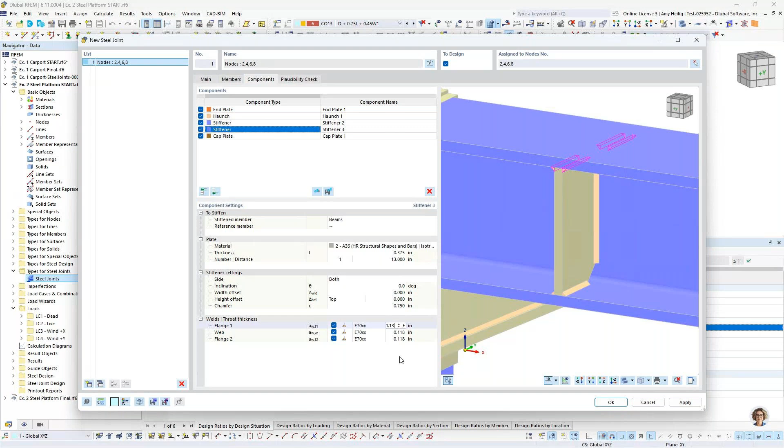So this connection is done, and you could save this here to your user-defined template. This will go into that library that we just saw. You could give it a name, a description, and you can always access this exact same connection with these same components for any other future RFEM models.

So the fourth tab, we really haven't visited yet. This is the plausibility check. This is a nice check when you are creating your connections - the program will warn you of any errors. So if you have overlapping members, or if we left this haunch here kind of connected directly to the member instead of the end plate, we would see those errors listed.

But also under this tab is that new ability to save this connection as a DXF. So we could save this in the lower right-hand corner. If we wanted to take a look at what it looks like imported into something like AutoCAD, you can see all of the various line elements shown here. So again, that was a new feature added just this week.

You also can save that submodel within this dialog box. I showed you previously how to do that with example number 1 after we solve for the connection, but you can certainly save the submodel before running the results with our option available here.

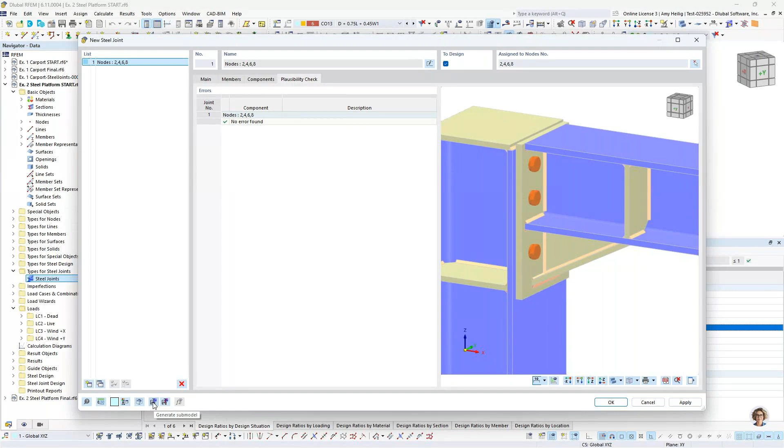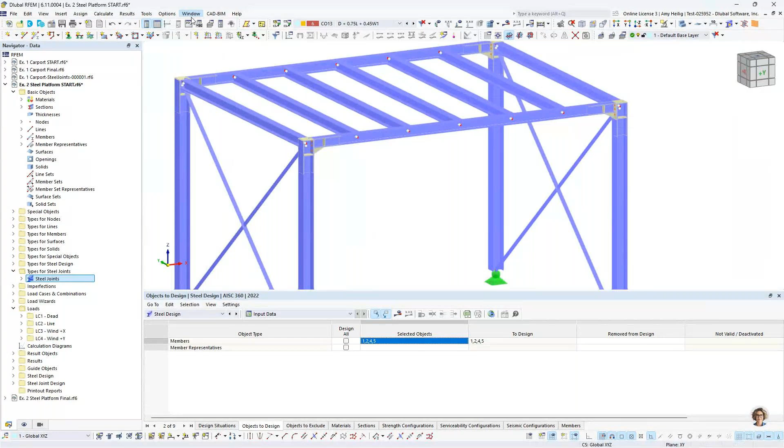Okay, so once we have this connection completed, we can actually see it applied globally to the structure. So we can zoom in here and we can take a look at the connection components defined at all 4 locations. So we will jump here to the results, and of course, we have carried out the steel joint design.

And very similar to example number 1, we can visit the stress strain analysis to view the various design checks of the plates, the bolts, the welds. But we also have an additional option in this dropdown called the stiffness analysis, because if you remember, we had told the program to carry out the stiffness calculations of this particular connection.

And what we see within this dialog box for the column is the true stiffness properties in kip per feet. You can see here for the axial stiffness in the positive and negative direction, as well as kip feet per radians for our rotational stiffness.

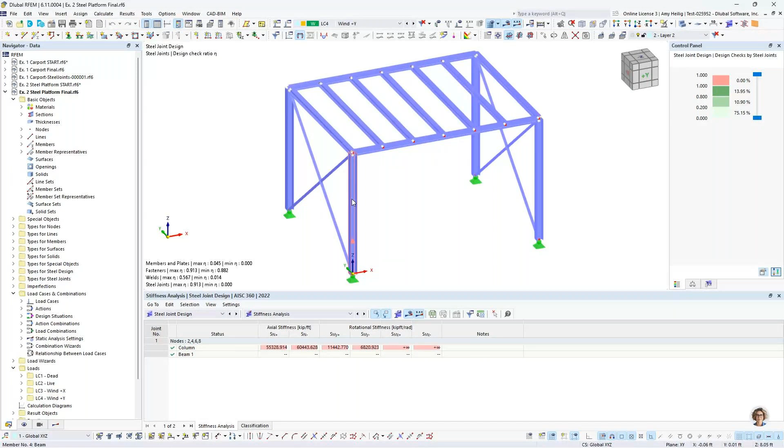So even more so, if I turn off the display of this connection and we go back into RFEM thinking more about the member design. If I double click on this column, you remember when we were reviewing the model, I said that I didn't apply any hinges to these column elements. Well, now you can see that this is automatically grayed out and turned on because the steel joints add-on has exported out the stiffness of this particular connection to the member itself.

And we take a look at this for translation and rotation. These are now set to the nonlinearity type diagram, and we can see this information directly input in here from the steel joints add-on for both our axial stiffness, but also our rotational stiffness.

So now if we carry out the design again of our steel members, not the connections but the members themselves, let's look at our design ratios. Remember I mentioned we're very sensitive to serviceability checks for this steel platform. We now see our deflection checks are actually failing. By taking into account the true stiffness of this moment connection from the steel joints add-on, we can consider that with the global model in RFEM. We carry out the design checks of the AISC, and now we see this failing design ratio flagging us that we probably want to make some modifications to our structure if it's sensitive to those deflections.

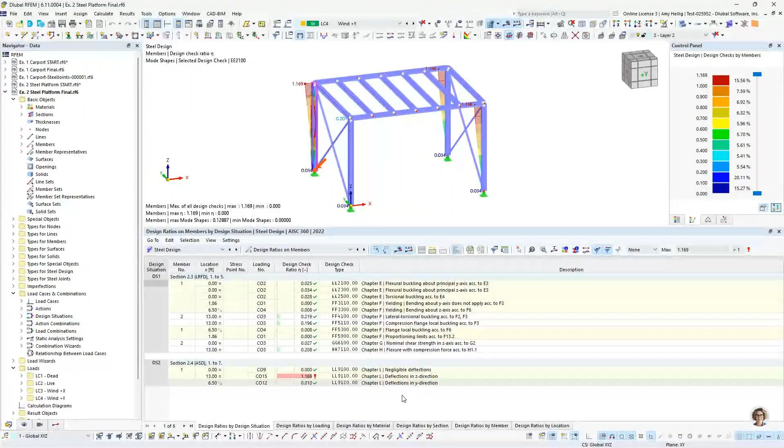All right, we'll go back to the PowerPoint here to close out today's presentation. I've listed a few additional new features here that you can review within this PowerPoint.

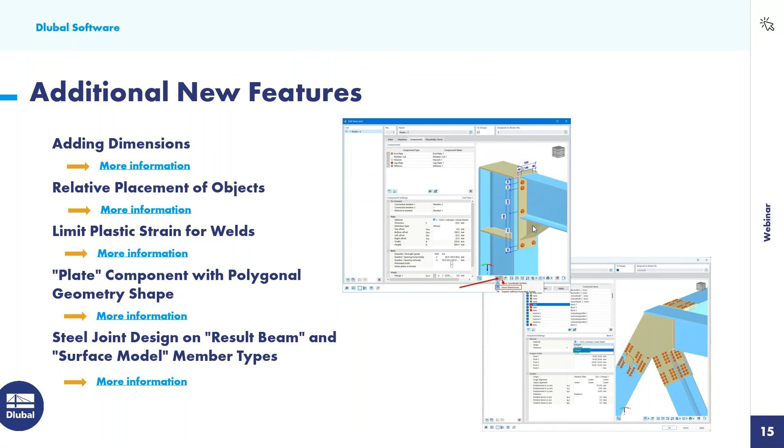We simply didn't have time to go over all of them today, but one worth mentioning is adding dimensions. If you're working in the components we just saw in these examples today, you can right click in the white space to add dimensions graphically. This might be user-friendly for determining offsets, placement of anchors, and components to help you out.

For our Canadian users, we definitely know it's really important to get the Canadian standard in the steel joints add-on as well, so we're actively working on that to bring it to you guys. We'll certainly keep you updated.

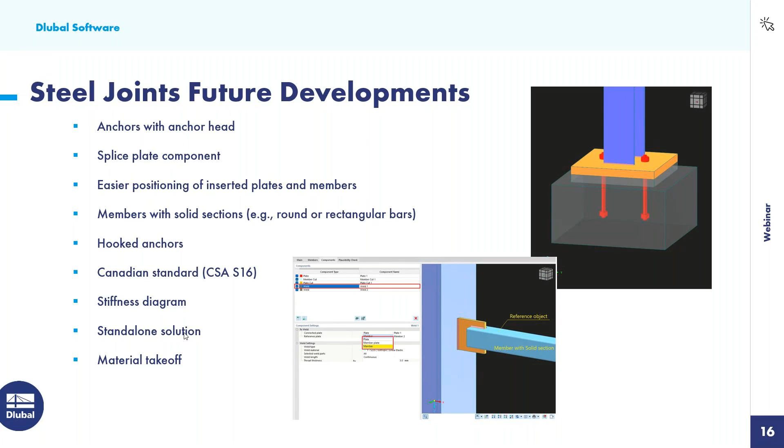Another big topic is the standalone solution. We recognize that not everybody has the interest to design the full global model, although that is an advantage. You can do individual connections by modeling a short member and applying member end forces directly to that element. But we want to develop a true standalone solution for connection design, not necessarily requiring you to model the full 3D structure. We'll continue to keep you updated as we carry through with these development features.